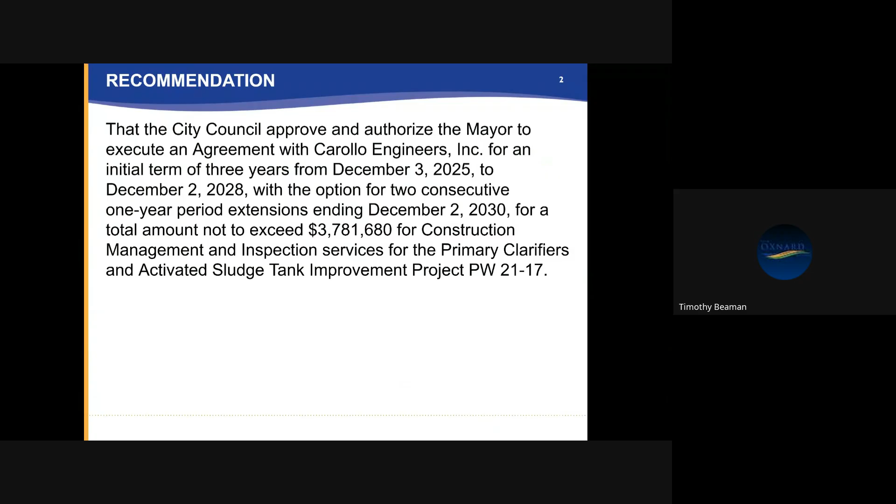The recommendation is that the City Council approve and authorize the mayor to execute an agreement with Carollo Engineers, Inc. for an initial term of 3 years from December 3rd, 2025 to December 2nd, 2028, with the option for 2 consecutive 1-year period extensions ending December 2nd, 2030, for a total amount not to exceed $3,781,680 for construction management inspection services for the primary clarifiers and activated sludge tanks project, PW 21-17.

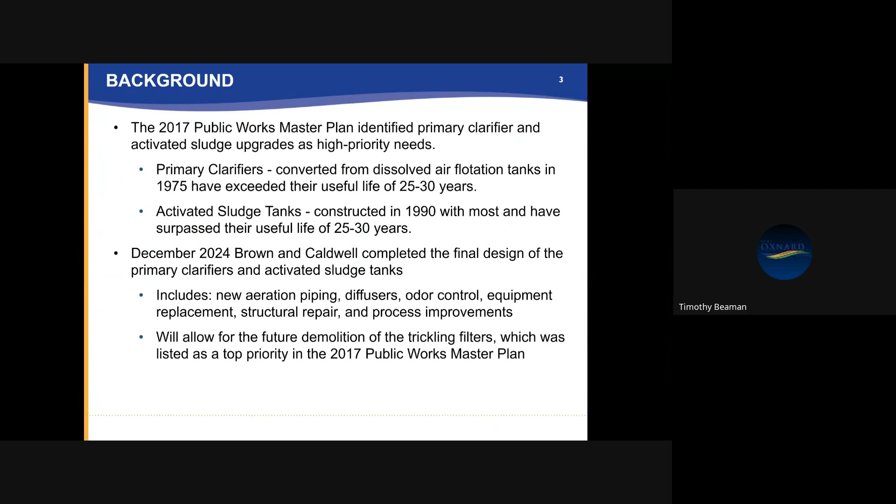A little bit of background is that the 2017 Public Works Master Plan identified the primary clarifiers and the activated sludge tanks as 2 areas requiring improvement. We did issue an RFP for a consultant, and Brown and Caldwell was selected back in 2021. And the work they did was to complete the design of both of these portions of the treatment plant. That design was completed in 2024. However, due to existing work that was already going on at the wastewater treatment plant, we decided to postpone bidding out this project till now.

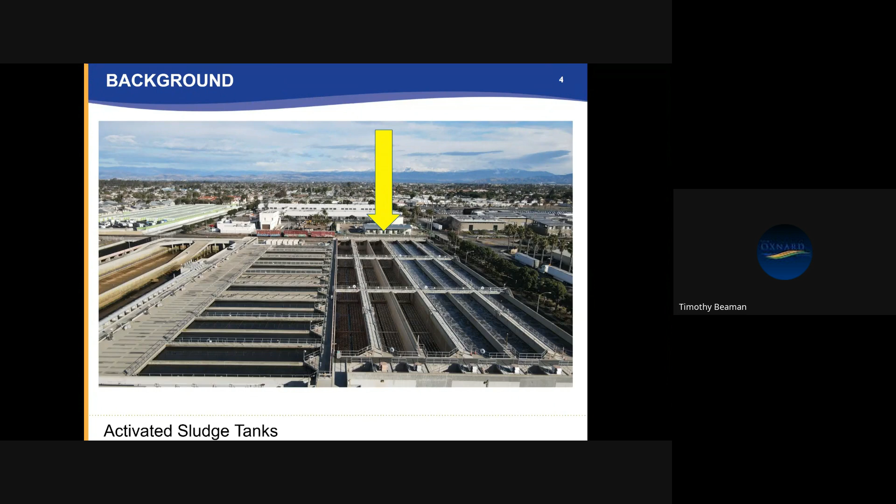Again, if you went through and listened to the presentation on the construction agreement, this is a little bit of repeat, but here's the aeration tanks. The ones on the right are in service, the ones on the left are out of service, and those pipe works on the bottom of the ones on the left are actually what we'll be replacing, all the mechanical equipment and analyzers. We'll also be adding in some baffle walls, changing a bit of the treatment process that will allow us to take down the biofilters.

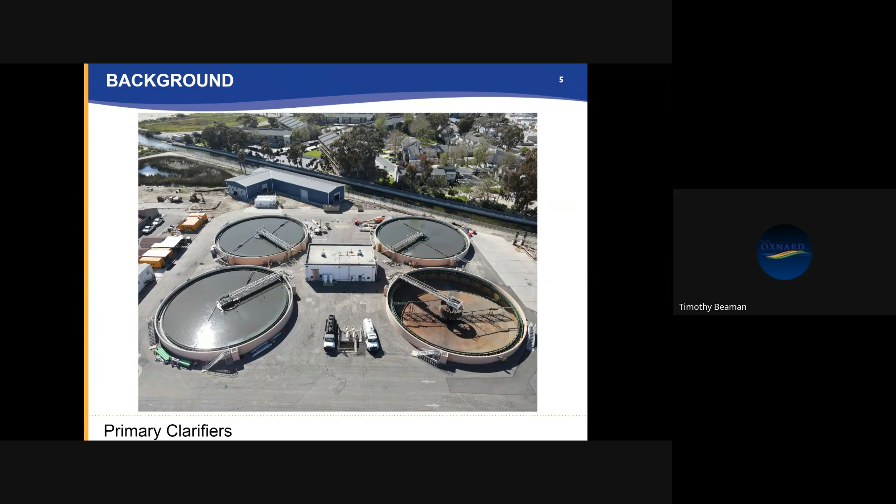Here's an aerial view of the primary clarifiers. Again, some of the older parts of our treatment plant and all the mechanical repairs, some underground pipe work, some structural repairs, and that building in the center will also be improved upon.

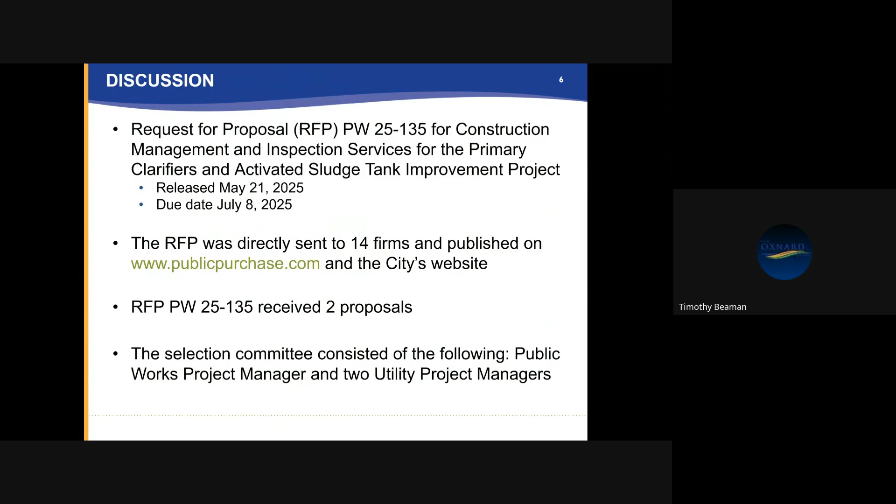So staff ranked the 2 proposals based on the following criteria: company profile, qualifications, assigned staff, project experience, project approach and understanding, and level of effort. Carollo Engineers was determined to be the highest ranked and experienced proposer. We have recently completed several projects successfully with Carollo providing CM services, and the team on this is very similar to the team that was on those other projects.

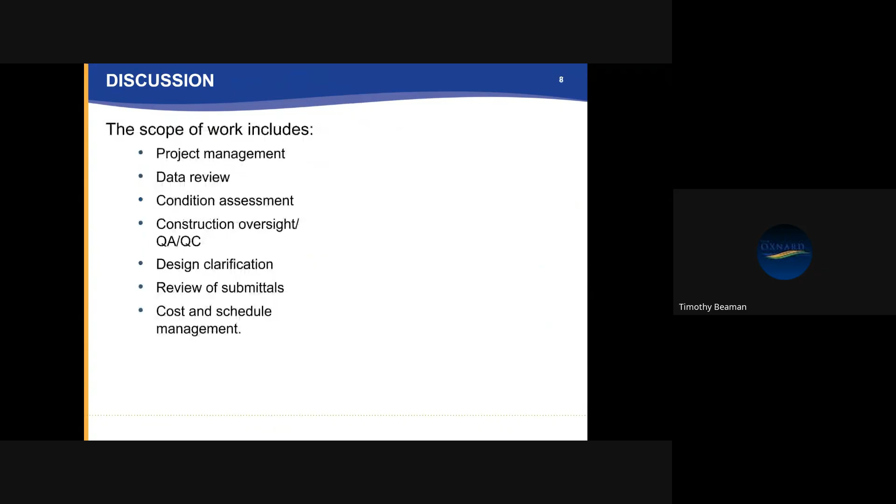So their scope of work includes project management, data review, some of the condition assessments, construction oversight, QA/QC. They help with the paperwork for any design clarifications. So if the contractor submits a request for information, then Carollo can either answer it or send it to the engineer of record. So there's a lot of coordination that goes into projects of this size, day-to-day document control, requests for information, potential change orders, payment applications, cost, schedule, all of that.

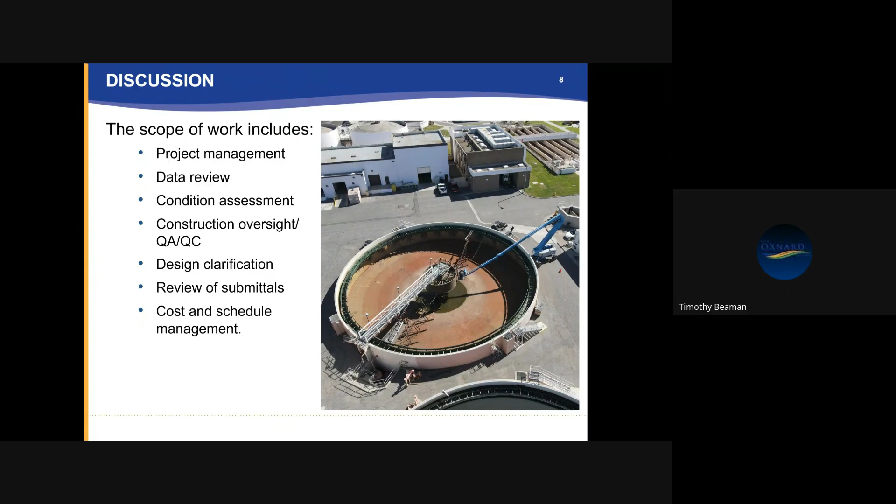And so for projects of this size, we have formal meetings every other week with all the stakeholders. And then we also have meetings on a more than weekly basis between the CM, the city, and the contractor.

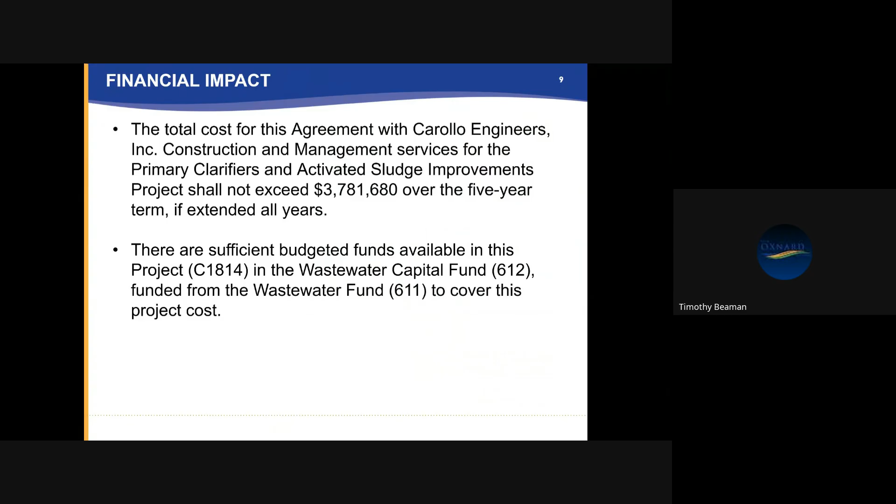So the total cost for the agreement with Carollo Engineers for CM services is $3,781,680, and that's over the 5-year term, if extended for all the years. And there are sufficient budget funds available in Project C1814 in the Wastewater Capital Fund 612, funded from the Wastewater Fund 611, to cover this portion of the cost for the project. This concludes the presentation.